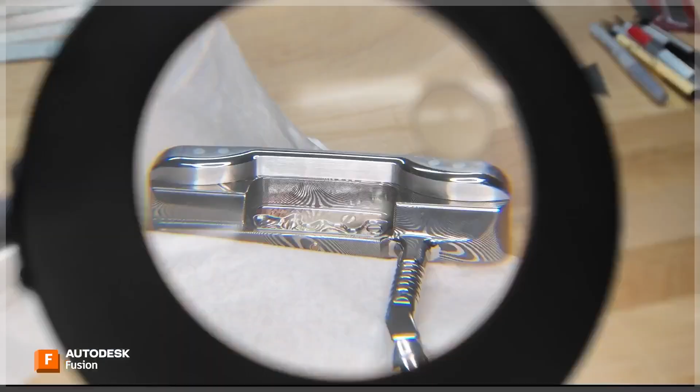All right, so for people that don't know you, can you tell us who you are and what you do? Sure, yeah, my name's Logan. I operate a service here out of Fortuna at my shop where I make putters for the world.

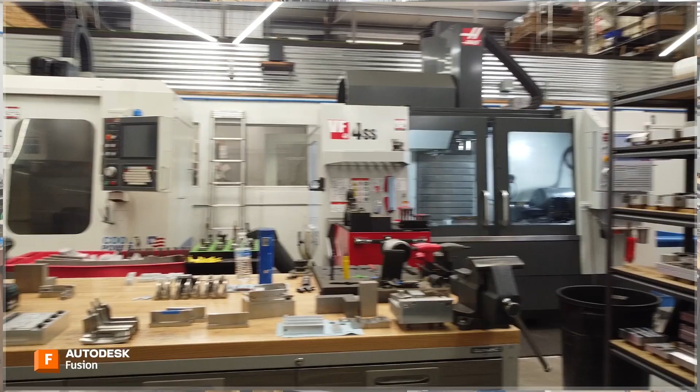I get the impression that these are some very high-end putters, is that right? Yeah, I like to think that high-end is a good word to mix in there. I think one of the things that makes my brand unique is I'm trying to tell a common story that a lot of brands do, but from a different lens. So much of golf is caught up in this one version of what everybody thinks putters should look like, and I'm really trying to strip back and tell it in a less polished way, a more real version. A shop that looks more like this versus something that may live in an art gallery, and share that process from the standpoint of somebody who got started doing this with no knowledge in CNC, no knowledge in making golf putters, and just had to figure it out along the way.

So no knowledge in CNC? Yeah, zero. And no knowledge in golf putters? Yeah. So let's start with why golf, like why did you get interested in that? Golf was not my initial plan when it came to this field of work. It sort of ended up there, and I guess it kind of started there. But my introduction to design and everything happened separate from golf.

I got really interested early on. My dad built custom homes, and a lot of people in my family do a lot of hands-on type work. Getting involved and taking drafting classes in high school was my introduction into the modeling world. Then I was going to school with an emphasis on engineering and engineering design, getting more used to running complicated modeling softwares. That was the very beginning of the CNC world. In high school, I had a woodshop teacher with access to a CNC router, a gantry router, and it was the first time I realized I could design something on a computer, create a to-do list, and have the machine follow that list to produce something. I thought, how cool is that? You get the ability to think of something, come up with it, and have a tool you can talk to in a certain way to make exactly what you need.

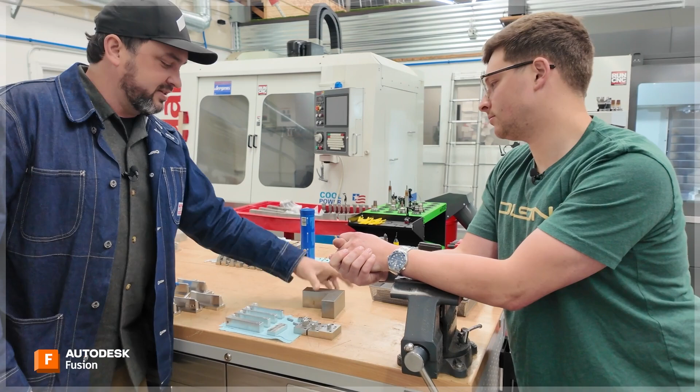But maybe we could start with just walking us through—like you go from this piece of heavy metal carbon steel, and you have a series of steps on your machines where you go from the raw material to the finished product. Could you walk us through that? Absolutely, yeah. So good example of some carbon steel right here.

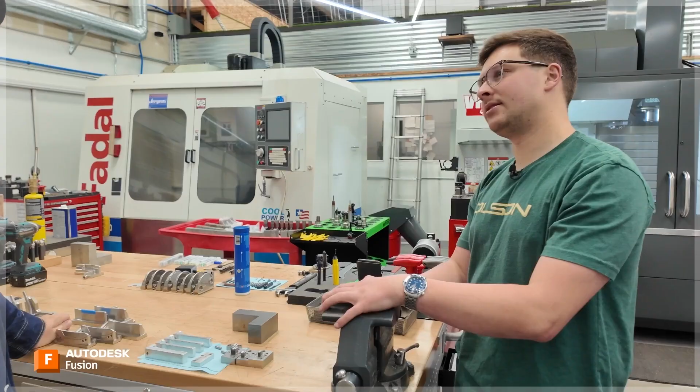The majority of the work that I do is out of stainless steel, but I've worked with all kinds of materials—from titaniums to aluminum alloys, carbon steels of all ranges, stainless steels, coppers, brasses, you name it. I've basically made a putter out of it essentially by now.

From the perspective of making it, one of the reasons I was always so enticed by the idea of having a shop and being able to create stuff is the conversation of the architect and the builder. You've got these architects who design beautiful buildings and create all these plans, and you give it to a builder and they're like, how are you gonna make this?

There's this divide where somebody who's designing it isn't giving consideration to the steps it takes to make it. So often for me, more than just getting the material and getting started, it's like, how do I approach this from the perspective that I have to make this at some point—so I design with the intent to make. And that's huge.

And I think so much of modern practice involves all these groups of people—you've got designers, and then you've got engineers, and then you've got applications, and then you've got these programmers and machinists.

So much of the product's been baked in by the time it gets to the people that have to make it. So much cost comes with the actual execution because they design features that are impossible to machine. Nothing's impossible, but very challenging, very expensive. And so trying to come up with a design that's manufacturable from the beginning, or design features that are able to be accessed, is huge. That's something I really tried hard to implement from the start - understanding that no matter how cool this is, no matter how awesome it looks, I gotta make it at the end of the day. So how can I design something that gives me the ability to make it?

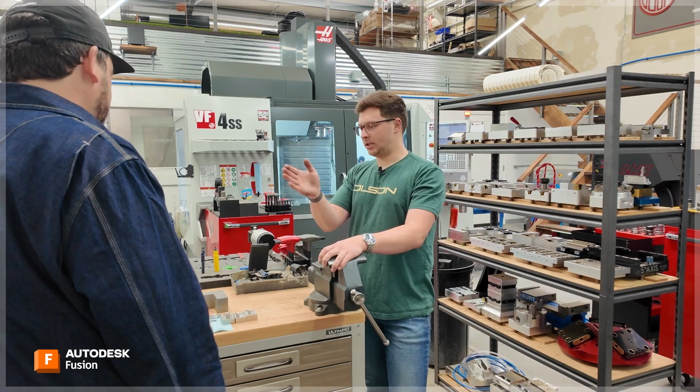And so from start, material shows up. Next step, okay, what will the fixturing look like? What will I have to design to hold this so that I can make the part, to complete whatever design that I need to complete. And then it's like, okay, well now how do I hold it in a second operation, because you have to hold on to material in the first operation.

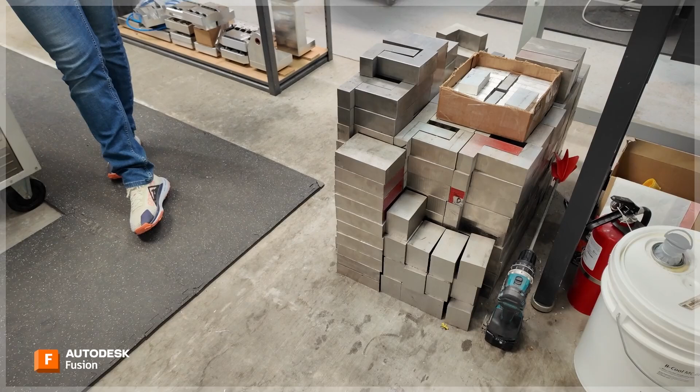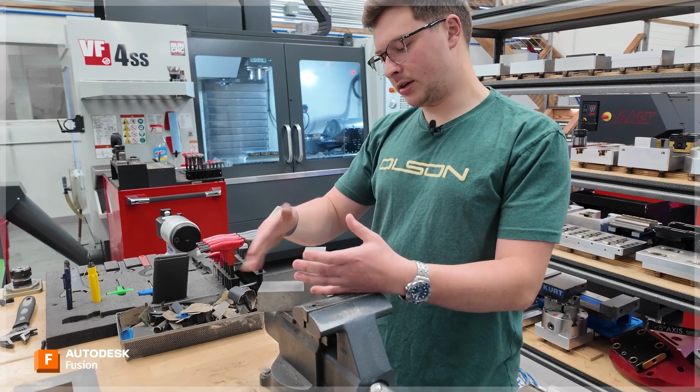So this is your stockpile. Some of it, yeah. I mean, I only see like 4 or 5 different shapes. Yeah, totally. So this shape is, for me, like a rapid fire shape. And what it is, it's a piece of rectangular billet that's been water jet into this L shape. Yeah, I can see the curve on there. Yeah, a lot of these putters, in sort of simplified form, is this sort of L shape.

So if I'm making a one-off putter and I gotta have this super fast turnaround time, this alleviates the need of extra material, and it also cuts down the cost of having to burn a bunch of material if this was a full rectangle.

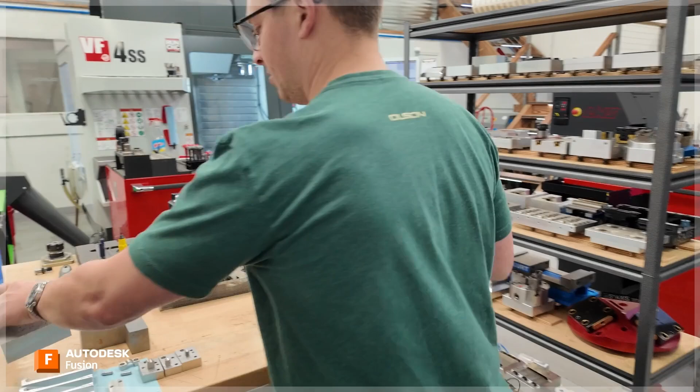Now, from the point of view of production, you're trying to maximize the amount of pieces out of the material as possible. You're trying to maximize work holding density, you're trying to fit as many pieces in at one time as you can. And so a piece of material like this gives me the ability to fit 2 pieces in at once. Oh sure, yep. And so these are made 2 at a time.

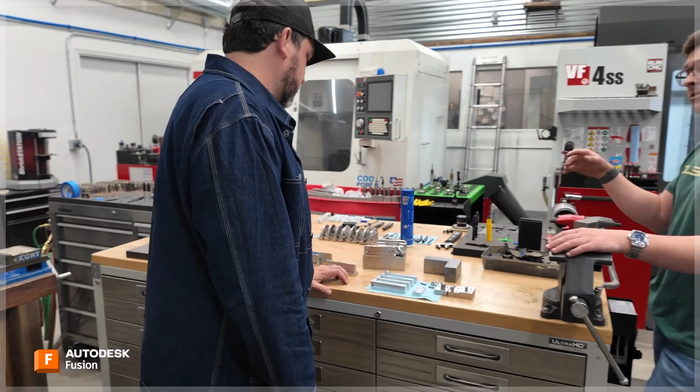80% of the putter blade work that I do comes out of these 2 starting stock material sizes. And that really helps simplify things from a fixturing side, because I only have to have a single fixture to start with for Op 1, and I don't have to have these millions of fixtures to make things. For Op 2, because it's geometry specific, you have to have a lot of different ways to hold things. But Op 1, it simplifies it like that.

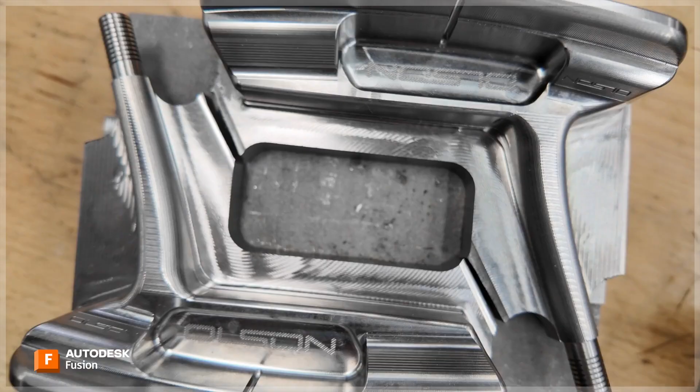And this looks like 5-axis to me? Yes, correct. So you do one 5-axis operation on these two. Then when you're at this step, you've got soft jaws for this particular model. Yeah, so I run a global pallet system for all of my machines. Everything that I use runs off of a 0-point clamping system. The one that I use happens to be from 5th Axis.

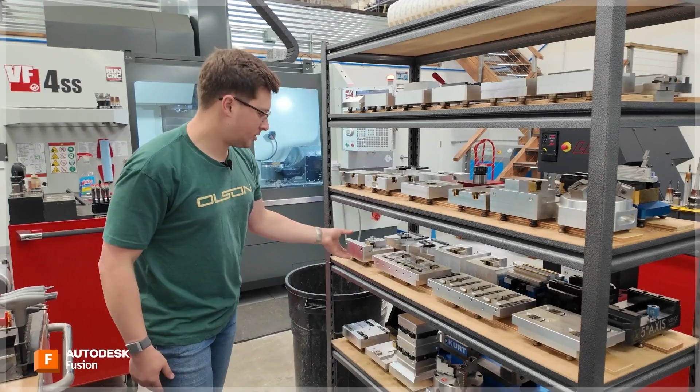And so it uses a pull stud based system, I'm sure you're familiar with - I'm sure a lot of people are. It's great, it's fast, it's affordable, and it gives me the ability to create one system for everything. And with Op 2, I try to come up with a solution that's flexible. Yep. And so this pallet is responsible for 50 different shapes of work holding at once.

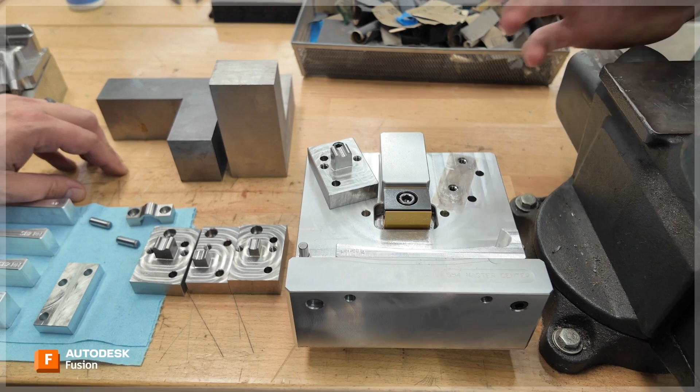So there's dowel pins and multiple axes. There's modular work holding solutions with Uniforce clamps and other bridge strap style clamps that give me the ability to hold these inorganic shapes without marring the surface, accurately locate them, and also rigidly hold them so you can cut them as fast as possible. And so all these pieces pull out, it's like a big Lego stack.

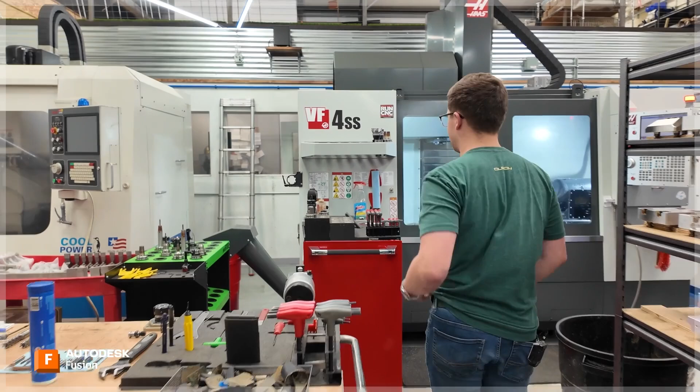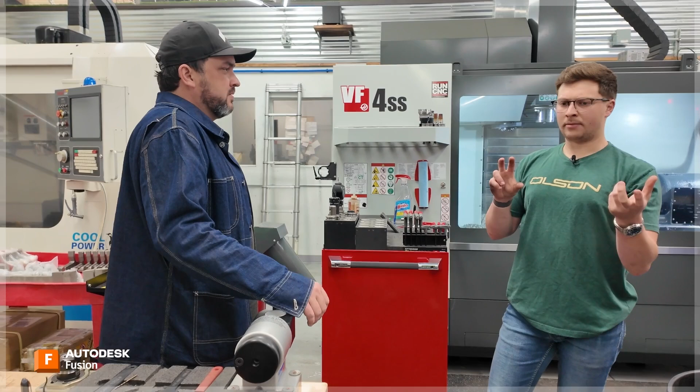Yeah, so this one fixture, how many different putters could you do Op 2 on? At least 50. Wow. Rights, lefts. So I'll show you. Anytime I'm doing work for like a tour player, there's a good chance that revisions need to happen. There's a good chance that we need to revisit something later or redesign from an existing model and change little things.

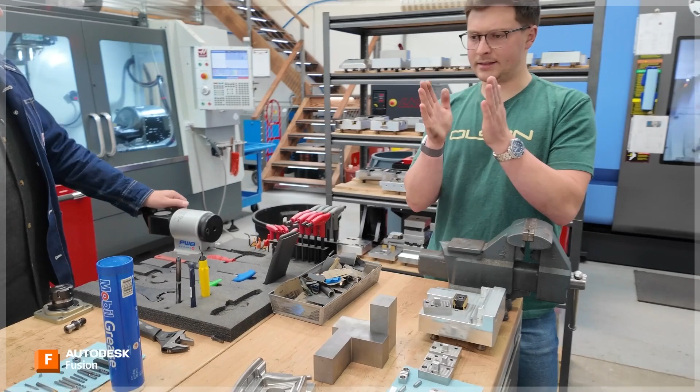I will save an exact piece of a fixture, because this piece marries against another piece of geometry perfectly. It's a perfect mirror image, it fits exactly. So this one piece I'll save, and it'll be part of the fixturing setup that clamps into that pallet that I can use over and over again.

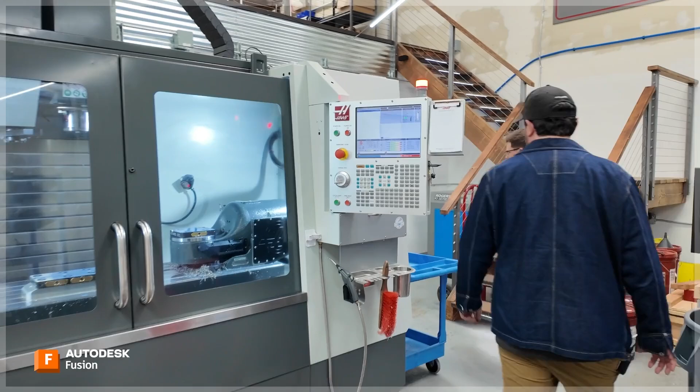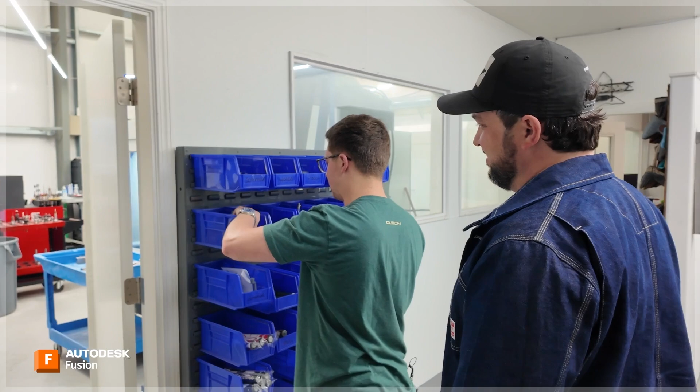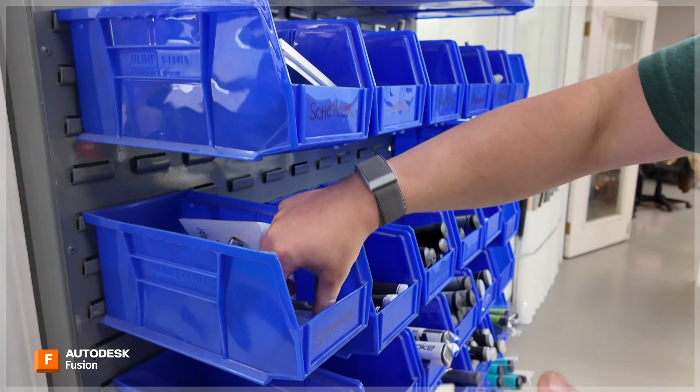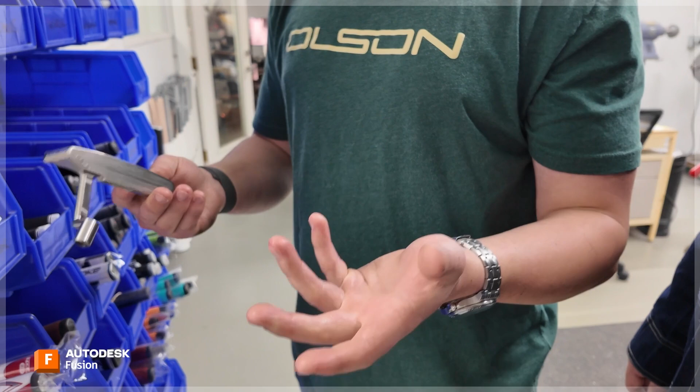For a player like Scotty, I've done so many putters for him. There's so many different fixture pieces where there's all these different components that are unique to one piece of geometry that I can go back to and revisit. They're all labeled, all numbered, all different shapes, and they give me the ability to use one pallet to change in and out of different styles or different head shapes, different geometries, giving the freedom to make whatever I need without having to start over from scratch every time.

This, I'm really impressed with your system here. Thank you. And where does 3D printing come into it?

So this is obviously done on a SLA machine. Yeah, correct. 3D printing for me is somewhat of a new practice. For a long time I didn't really see the power of printing because I have these machines at my disposal, and I'd make the argument that I can make a product start to finish faster than you can print it. Why would I waste my time?

Come to the flip side of it, now I want to design something and I don't want to invest the time in making it, and I can let another practice happen in the background while I'm working on something else. So I use the Formlabs printer basically as a rapid prototyping overnight. I'll design all day long, come up with something I think is cool, set it up in the printer, walk away, come back in the morning, didn't have to do any setups, no tooling, no wear, nothing like that, and I can see a general shape.

Now it's not perfect, right? It's not metal, it's not exact, but it gives you a real rough idea of what you're looking at.

One of the things I found time after time is you can design something on a computer screen, and when you see it in real life, somehow it's always a little bit different, especially with something visually impactful, like a lot of players are really looking for something visually super specific. You design it on a computer screen, you make it, and it always sort of looks different.

So having the power to revisit and iterate and do things on the back end that doesn't really cost anything, resin's cheap, the cost to operate those is way cheaper than running one of these. It's a really cool way to come up with iterative solutions without investing a ton of money and time into something.

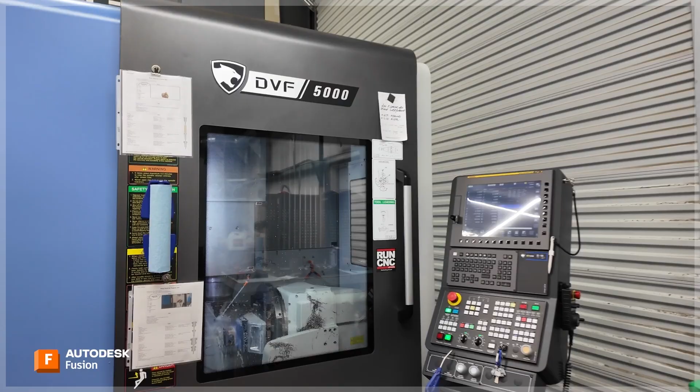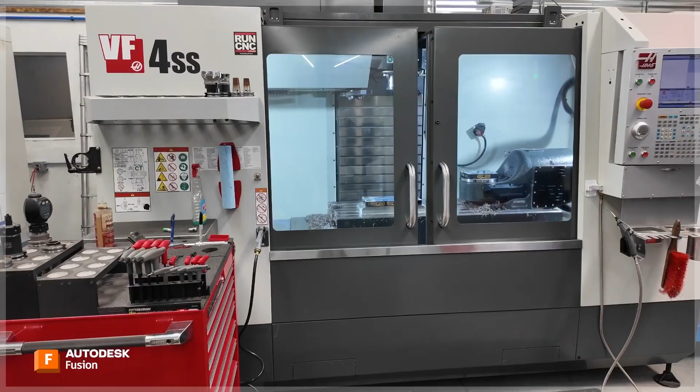So you'd start, so the OpZero would be on a 3-axis machine? Yeah, so that's like a 3-axis and a 5-axis. It's got a trunnion. Oh, you got a trunnion on that one? Yeah. Oh cool, let's check it out.

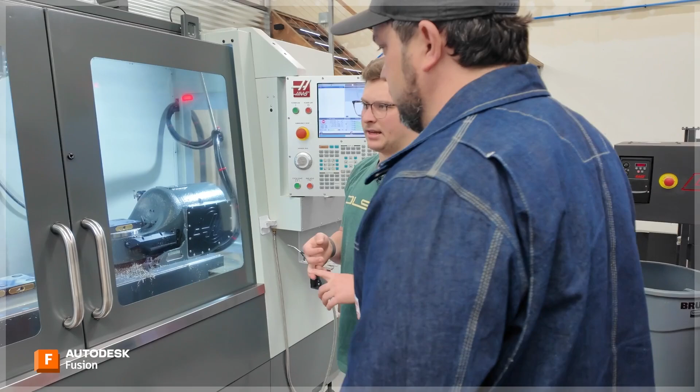So this would be, for the work that I'm doing, because the demand for accuracy, speed, and flexibility is so high. When I say flexibility, I don't mean the machine is actually flexible, I mean the ability to be working on a lot of different things at once. This machine doesn't really solve that problem for me. It's great for stock prep, it's great for certain things, but the tool magazine size can really be impactful when you're trying to run a lot of different parts at once.

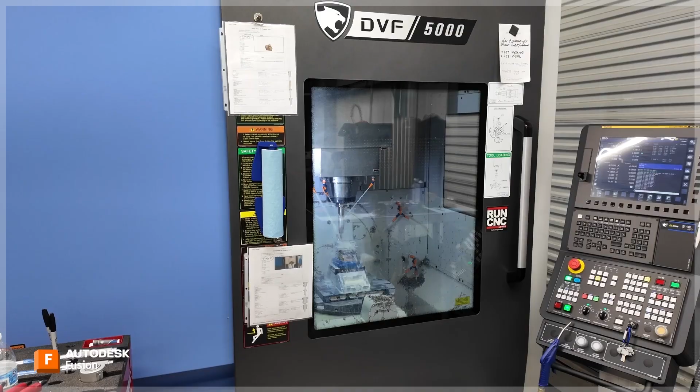That's a 31 tool. This is a 120 tool. So I've got the ability to not set up and tear down a million times, where I can just sort of keep rolling. So I do a lot of stock prep on this machine.

So dovetail cutters, face mills, profile mills, chamfer mill, stock full of that. And you got a really big platform because you're able to do two different operations at once. You could run the trunnion, or you could just do this plate for the 3-axis.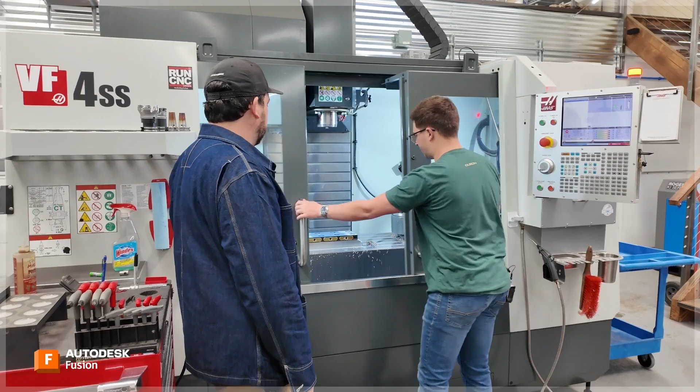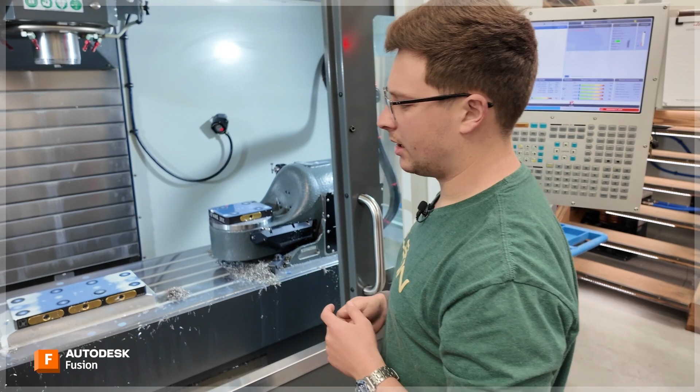When I bought this machine originally, the sole reason I got it was the fact that you have a VF4 plus a 5-axis. You stack it at the end of travel, you can measure it. It is a VF4 plus a 5-axis, so you get the work envelope of a pretty standard 3-axis mill with the ability to also run 5-axis.

Theoretically, if you needed the work envelope space, you could tear that off and run a big 3-axis platter. These machines make money when you spend the time upfront in the design work - the fixturing, the programming, the setup - and you make one good, and then you print money. You just run and run and run.

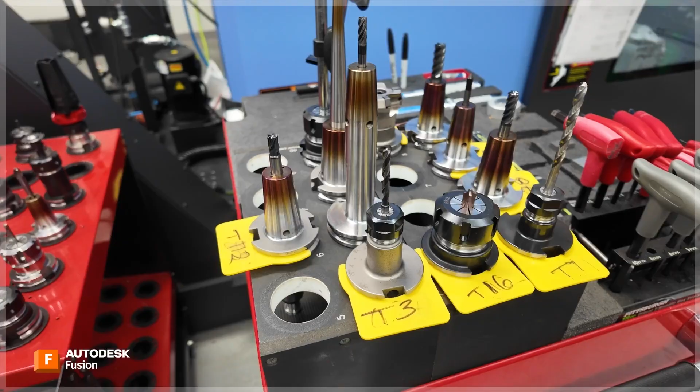Okay, so you got the Haas 3-axis with a trunnion, so you can do 5-axis on it if you want. Usually OpZero is on here, so your first step when you're making a finished product. You got 31 tools in this one. This one has 120 tools - a 120 tool magazine. It's an absolute monster.

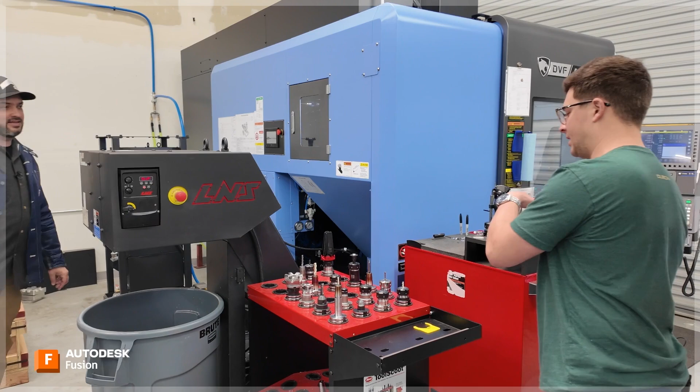From a capability side, one of the things, again, trying to transition - I had a 3-axis machine when I first started. That machine has a 4th axis on it. You start unwinding the potential of like, where can I take this? And from a cost standpoint, as much as this is expensive, this was a much more achievable price point to get into 5-axis.

For me, the conversation around 5-axis is not so much that it's so much harder, but it makes you think in a different way, because now you're designing from the start way different, because things that were impossible to do, you can articulate and you can hit those features. Then from a simultaneous standpoint, the complexity really starts to add up. But in like a 3+2 land or even like a 3+1 land for a 4th axis, you just start thinking different because more things are accessible.

So let's stay on the operations per putter track. You started, OpZero is on here. Then you're moving on to Op1. Where's that happening? So the Op1 is going to happen in here - meat and potatoes, right? This is where we'll say 70% of the program volume is happening, having the most amount of material removal, the longest cycle time, the most amount of tools involved.

And again, the magazine being so big lets me do a few things. It makes super accurate fixturing on this machine. The accuracy of this machine's over the top - it's got glass scales on every axis, you can hold tenths all day long. It gives me the ability to make super accurate fixturing for every machine, but also make any part that I need to make in this Op1 sort of world.

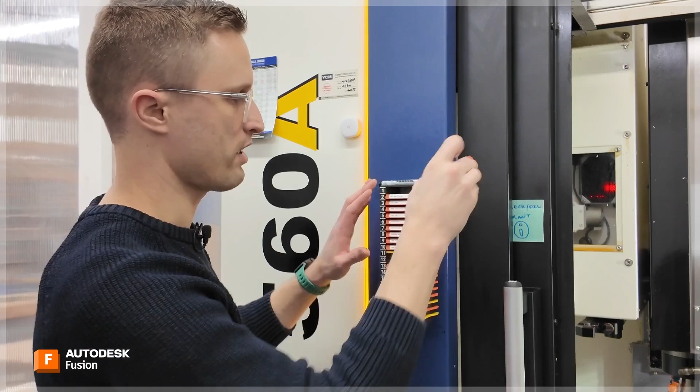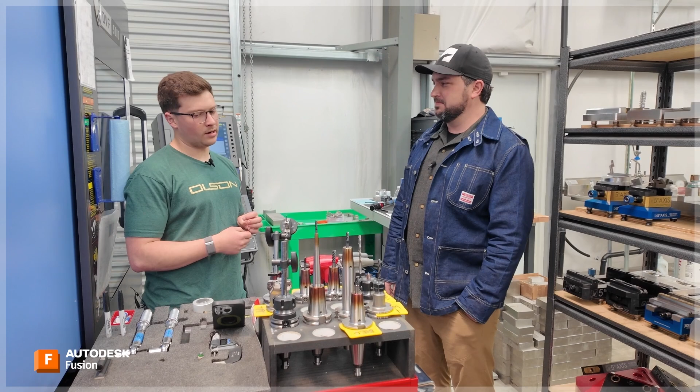I got onto this a little bit from the Pearson thing, where I call it a frozen tool library. Every machine in here has an existing tool library of 1 through 24, because that machine, the smallest tool library I have is 24, and there's standardized tooling for those tools. So every machine will have a half-inch tool, 5 flutes, 1 1/4 inch length of cut, and a heat shrink, bam. Every single tool machine shares that tool.

So anytime I pull out a frozen tool, it gets labeled. And this machine has so many extra pockets, I rarely have to pull them out unless I'm doing a production run that's super specific with a lot of tools, or I'm changing tools out for certain things. But yeah, the only things that get swapped are frozen tools.

Cool, okay, so you're doing op 1 on here. Is this the rest of the operations are going on with this machine? Theoretically, yeah. And so again, from an accuracy standpoint, I don't have the ability to make it twice sometimes. My lead time sometimes is like 24 hours. I've got to design something, test it, execute it, complete it, finish it, and ship it in a period of 24 hours, so it has to be right the first time. I lean really heavy on this machine, just on the fact that if I do my job, it's going to do its job, and the part comes out correct.

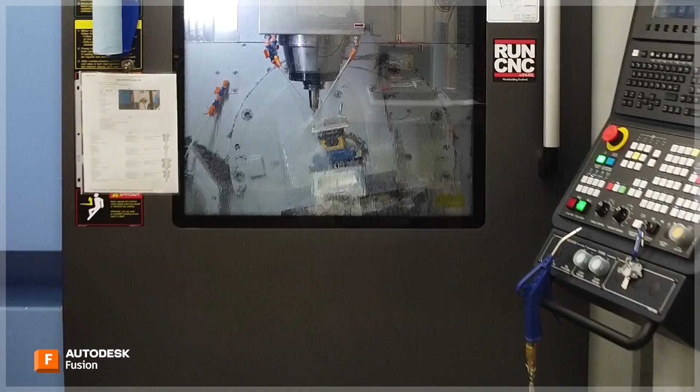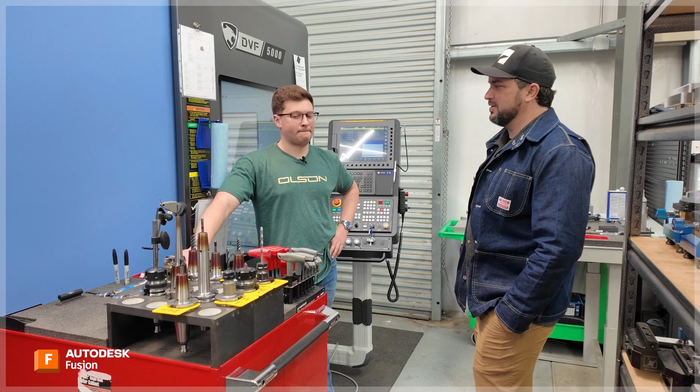So there's some pretty complex physics going on here. And you don't have a degree in this. No. Can you tell us how you figure this stuff out? Should we go in your office to look? We definitely can.

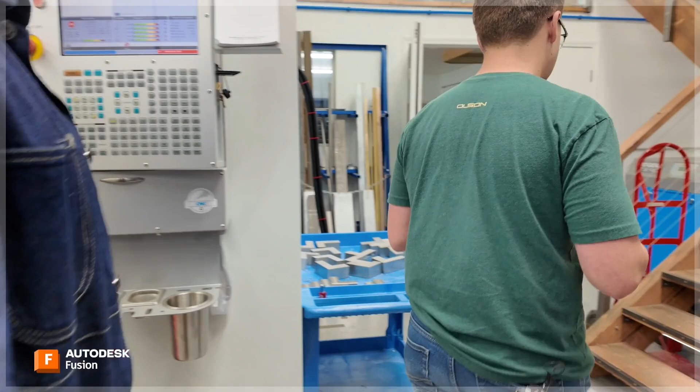A lot of it's trial by fire. You make a lot of mistakes, and at some point, all the mistakes you make turn into some success. A lot of it is also utilizing equipment and software that can help lift that heavy weight of not having the ability to dissect these problems from a degree standpoint, maybe. So being able to use a material library inside of Fusion, for example, is a great way to start when I'm trying to come across.

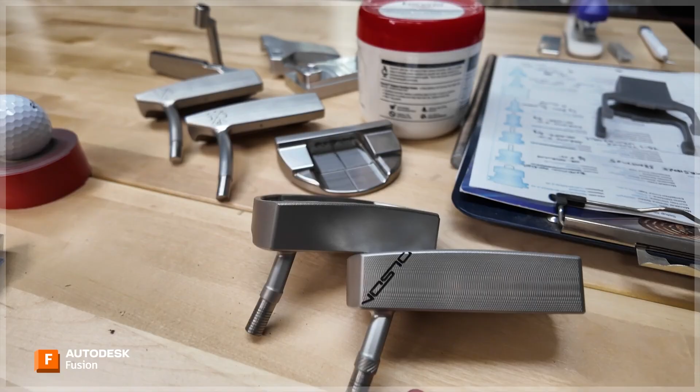A lot of times an athlete will make a request, and the request will be, I want a putter head weight of 343 grams and a swing weight at E5. So being able to use the material library to generate these rough drafted versions of what a total weight will be - okay, this component is made out of tungsten, this component is made out of T6 6061, this component is made out of 303 stainless. These are the mass properties of these combined, this is your total yield weight. That's a great way to combat the fact of, gosh, how much is this going to weigh?

And then from the standpoint of sound, using modal analysis to dissect what frequencies these are going to resonate at. As a putter, you're hitting a putt and it sounds crazy, but they are so sensitive to sound and feel that I have to use these tools to help dissect these problems, because handing them a product and saying I made this, and having them test it and it doesn't sound right, that door is closed, right? So you have to do everything you can to utilize all these tools at your disposal to come to a place where you're confident with the thing you've made, and you just hand it off, and it's like, okay, it's yours now, you know?

Give us an example of a putter that took way too many iterations to get right. I know we talked about Scotty a few times, but he's definitely a player that I spent the most amount of time with. I was making a putter for him every week for almost a year - the 62 putter. So back to sound, back to feel, back to testing, there was an incredible amount of time spent changing the neck geometry of the putter. On a putter, there's a lot of different features, one of which is commonly referred to as the neck area.

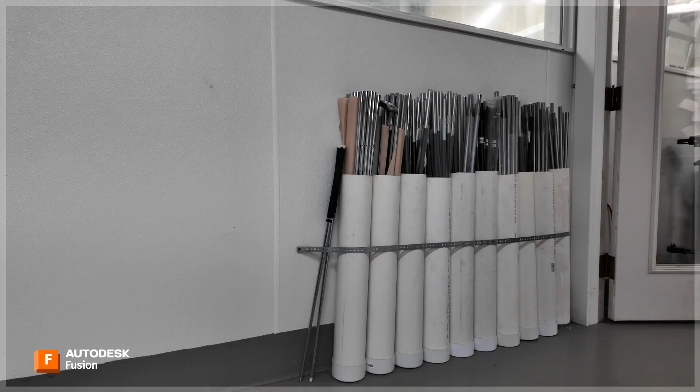Yeah, so let's go check out what you're doing in software.

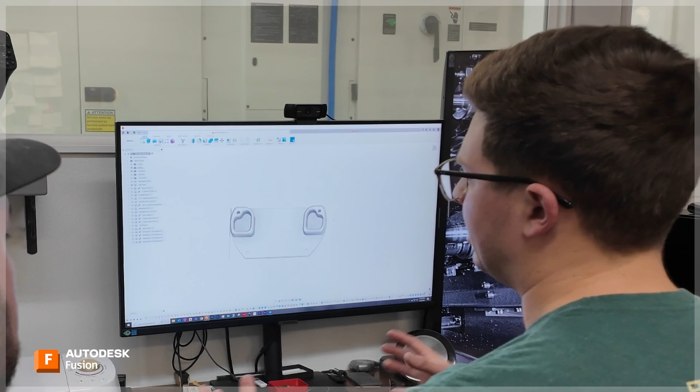Yeah, absolutely. So here's a project that I've been working on. It's like a mid mallet shape, this will be made out of 303 stainless steel, and it also has a multi-material construction. There's an aluminum sole plate here that is there for mass distribution, mass removal, and also to sort of close the structure. So yeah, this is a pretty decent example of a very simplified model in the sense of, hey, this is the only thing on the screen.

And then is there any simulation in this one? Oh yeah, absolutely. It'd be interesting to see what you're doing there.

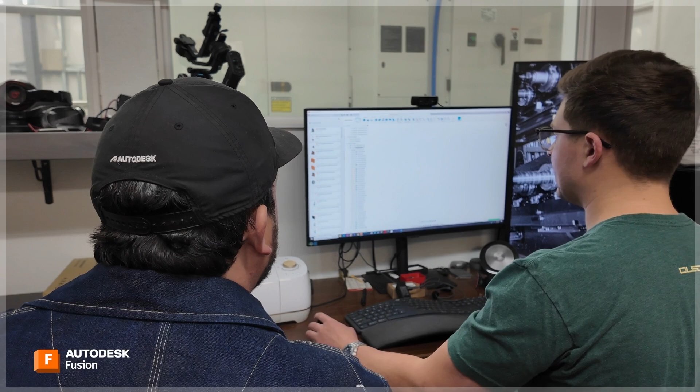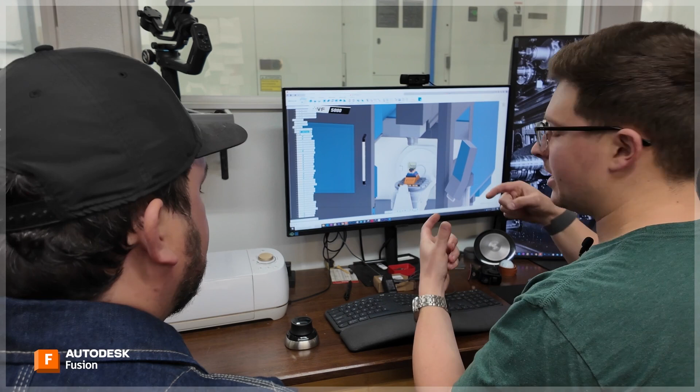Yeah, so back to the conversation of 3-axis versus 5-axis, one of the powers that I've recently been using a lot is full machine kinematic simulation. In 5-axis land, this is so critical because it's hard to watch everything that's going on sometimes. Especially with full 5-axis cuts, you have this point control in motion, and then you have these reposition moves that can be very erratic. The reposition moves are something I really try to watch a lot.

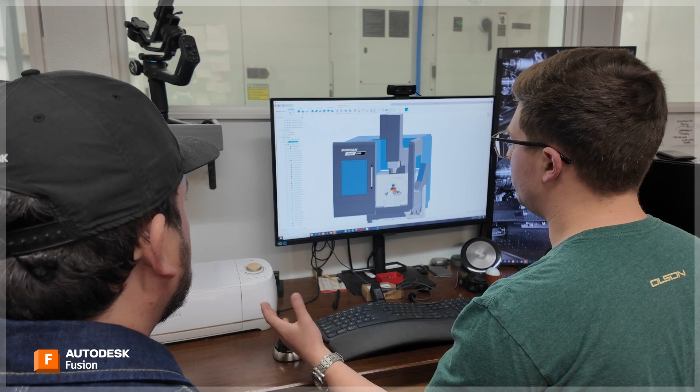One of the cool things I could do here in the manufacturing menu is you can build out your entire tool stack, build out your entire machine, which a lot of times is provided through Fusion or through the manufacturer. You can do a full machine simulation to simulate the entire cutting process. Now it's not going to tell you things like your step over is too big, or this cut's going to leave poor surface finish, but it gives you a real good understanding of the physical thing that's going to be happening before you have to walk out there. Because what's really great is to watch a simulation spindle crash into a table versus a real spindle crash into a table. So we can simulate with the machine here.

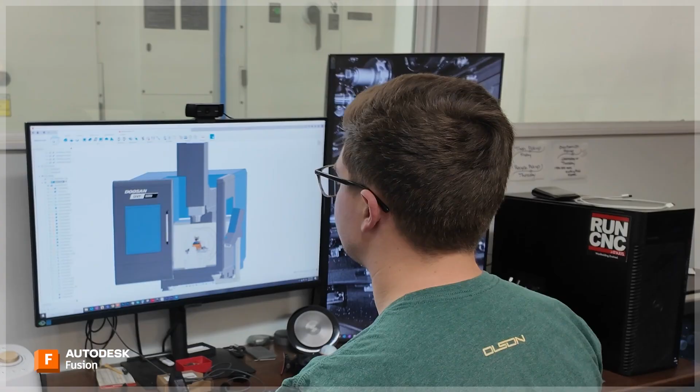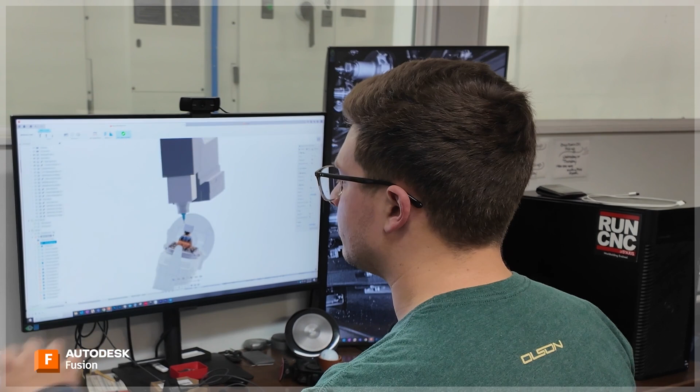How many operations is this? That's over 100. Yeah, so the toolpath tree is pretty long. Wow, and that's just for that one piece, and this is a multi-part. This is just for one piece of that. Yeah, that's correct.

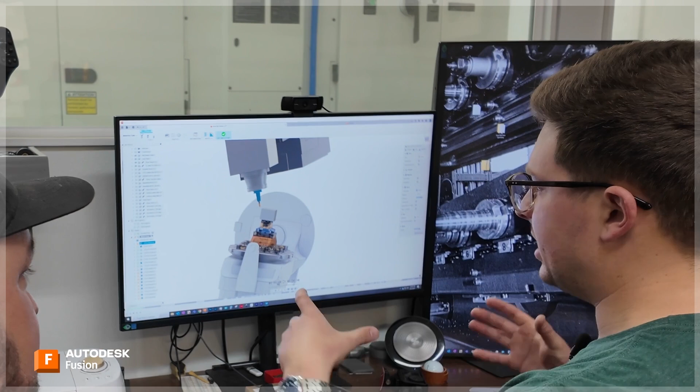So again, because we're in 5-axis land, this simulation is going to pin the part in space, and then the machine is going to articulate around the part. Now in reality it's almost the opposite, but this will give a general idea visually of the process I end up looking through to verify my tool paths, to make sure everything's happening in real space correctly and things aren't crashing into each other.

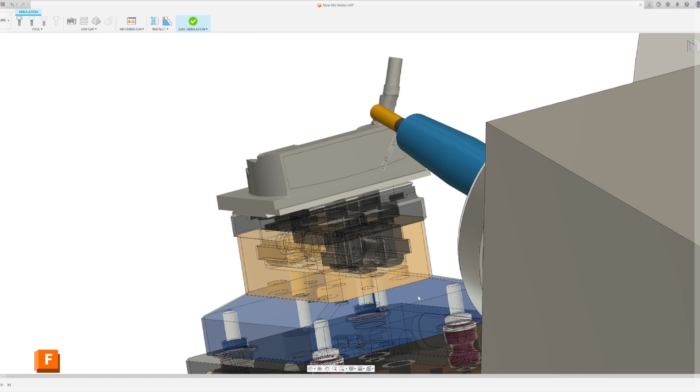The majority of the work that I do, even with the ability to run full simultaneous 5-axis, ends up being 3+2. It's hard to beat the efficiency of rotating a part and hitting a feature. Now, anytime I'm attacking very complicated things and creating really consistent tooling lines...

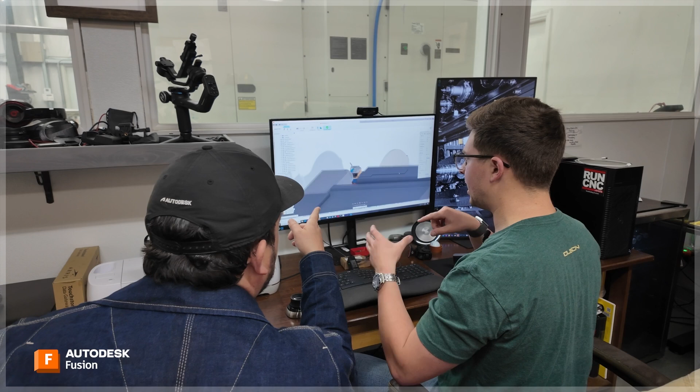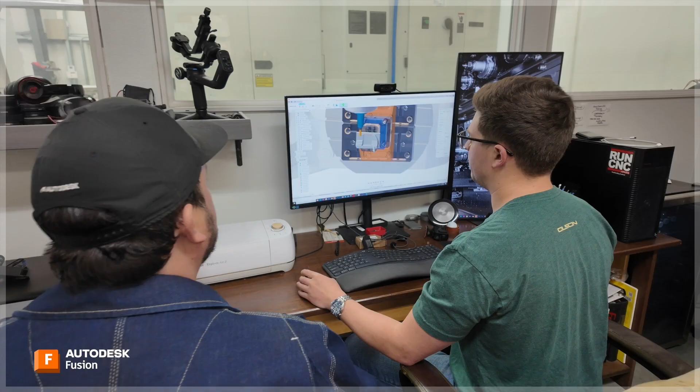Is that a probe operation? No, this is actually an engraving trace operation. I'll use a lot of simultaneous 5-axis motion for that. It's more a function of trying to leave a very consistent tooling pattern on the part visually. Right, but yeah, it's hard. Interesting, so you use the continuous 5-axis to get basically a surface finish.

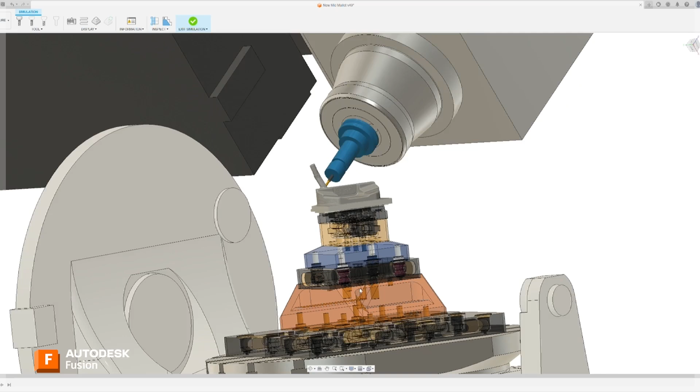As much as I keep talking about the accuracy of these parts, the first thing the customer sees is not that I'm within 5/10 tolerance. It's how good does this thing look? And it's not even how good is the surface finish, but how good does this thing look overall. And me being able to control the surface finish, I can control how good that thing looks.

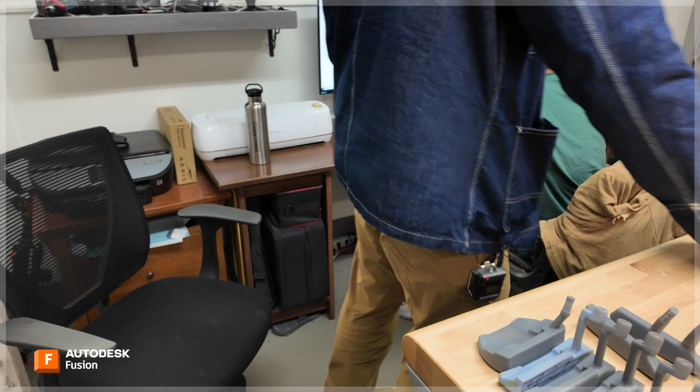So here's just a little library, and we can scrub through these really fast. In the interesting materials conversation, you've got access to every material under the sun. Why not make a putter out of forged Damascus steel? I have one here, I'll show you. They're just outrageous to look at. Damascus steel is such an eye-popping material.

So like this one, that combination of cutting edge technology, interesting materials, and also this piece of hex bar that I welded on here, I blended the weld out completely with stainless filler rod. It leaves this transition where the filler rod blends perfectly into the head, but when you acid etch it, you can see where the filler rod is. Then I heated the hex bar up with a torch, twisted it, and then polished it out to a mirror finish.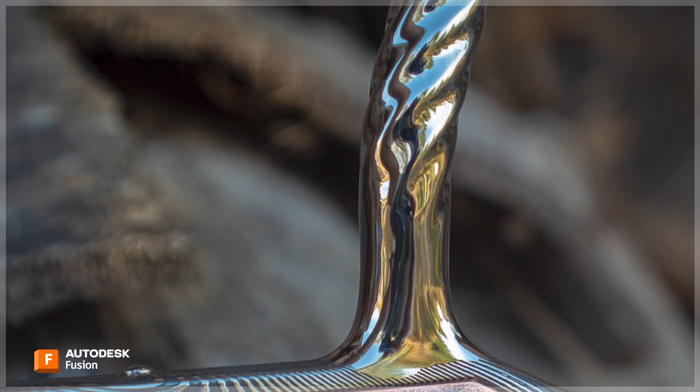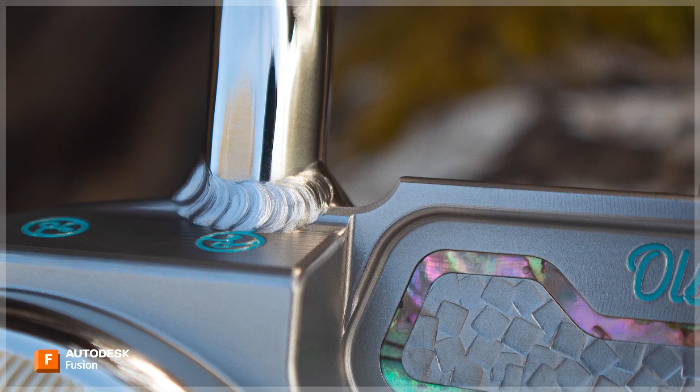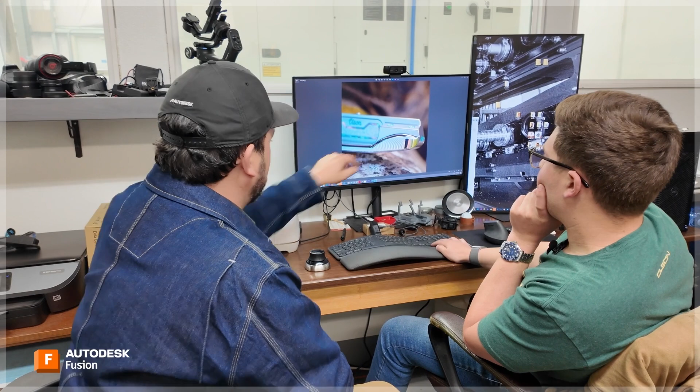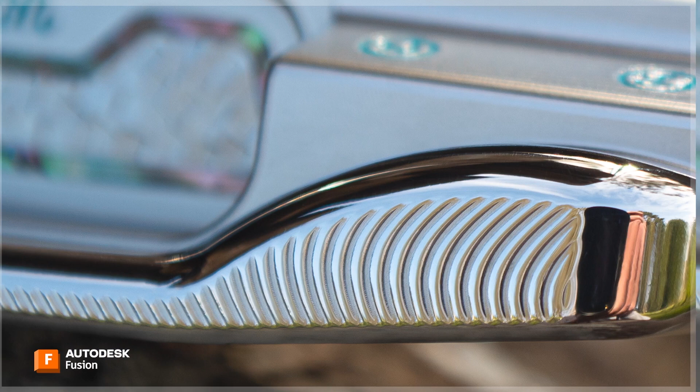So like that one, it's again a piece of hex bar that I've twisted, TIG welded on, and then machined mother of pearl and inlaid that into the cavity. The tiny inlays are stamped in - this is my logo hammer stamped in, with a cured enamel. And this is a radial tool path. I love that the tool path becomes the aesthetic. I've used that exact practice my entire time - people have always gravitated towards my brand for the unique finishes and textures, and I'm like, guys, they're tool paths. I'm tweaking the tool path, and I'm using a very cold thing to make a very warm finish.

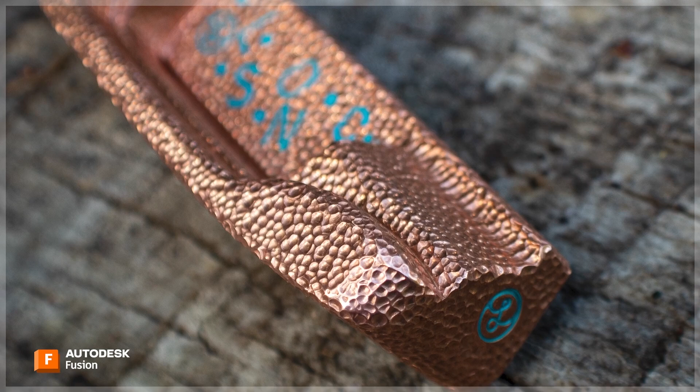Oh yeah, so this is a putter made out of copper, and I machined a 16th ball punch out of tool steel, hardened it, and then hammered the whole thing. That's a really complex thing to do with it. Yeah, that was punch too - the little squares. So here's some copper inlays. Man, that's pretty.

Can we go look at some putters now? Sure, absolutely.

So you got your own putting green here. Yes, I love it. This is where you test stuff out? Mostly for me. What's really interesting is trying to put myself in customers' shoes to dissect things that they say as word comments. So this is pretty integral in the process. Obviously, everything I make has to be tested - you're giving it to the best players in the world, you're giving it to whoever, it needs to be right. So doing what I can to use my feel and my ear to dissect as much as I can. I use this space a lot.

My brother's gonna make fun of me if I don't get this. You had plenty on it, that's for sure. I could sink this one. Nope, I guess I need to get to the golf course.

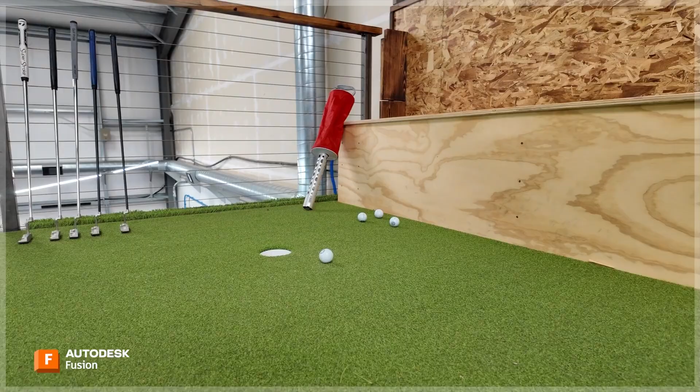Most people looking at that would think, how is this really any different from that as far as the way it's going to behave, but it's completely different. Same material, same weight, same swing weight, slightly different design. But you just adjust that one variable of how it's interacting with the cover of the ball, and you can completely change the dynamic feel. I can see why they come to you, man.

Thanks so much for the tour. This is absolutely super interesting. Yeah, thank you.